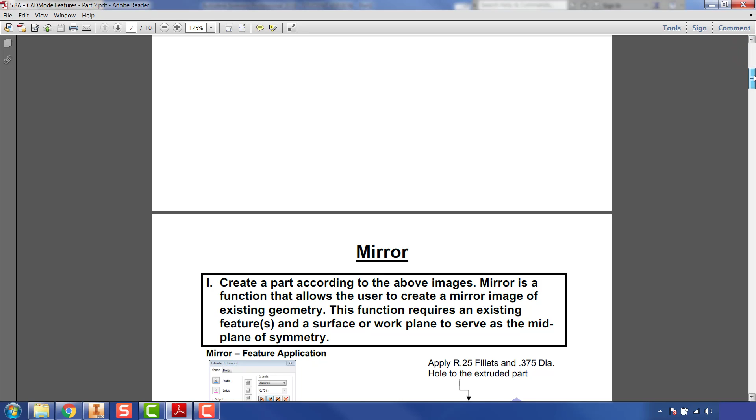For activity 5.8, there are going to be 4 parts you're going to create. The first 2 of those parts are going to primarily use the mirror command. We have this first part, which is our mirror practice, and then the second part, which is the connector piece.

So the first thing I'm going to do is make this practice piece, and we need to make this L-shaped extrusion using these dimensions. We're going to add some fillets and a hole, and then we're going to mirror that across and make our mirrored part.

So I'll go ahead and go over to Inventor and open up a new part. And I'll start a sketch on the XY plane. And I'm going to use the rectangle command to make my outline for that L-shaped bracket.

You could use the line command by selecting line and then just outlining. You can do it however you like. I think rectangle is a little quicker, so that's what I'm going to use.

And if I look at my activity sheet, the left-hand side of this is 0.5 by 0.75, and then the right-hand side is 0.5 by 1 inch tall.

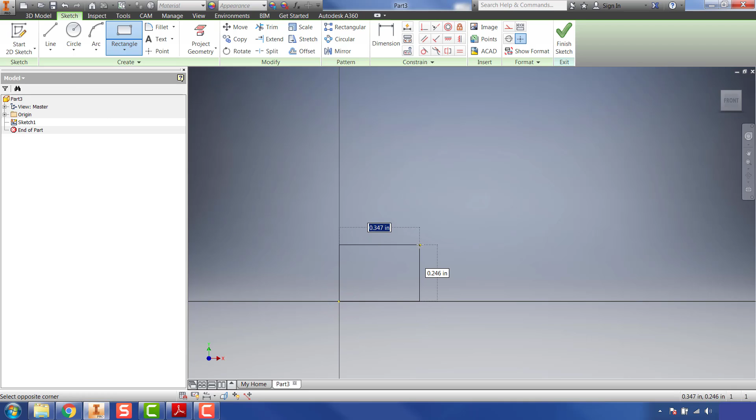So I'll go back to Inventor, snap to the origin, and make it 0.75 wide, and I'll tab to the other dimension, which is 0.5. And then I'll use another rectangle command, snap to the bottom right-hand corner of the one I just made. It's going to be 0.5 wide, tab over, 1 inch tall.

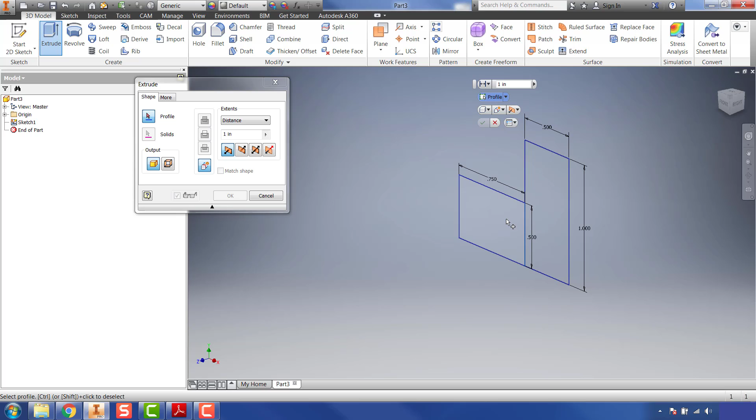I'm going to finish the sketch. Use the extrude command, and if you use the line command, you'd only have one profile to select, or it may automatically select it for you. I need to select both of mine.

And if we look at the activity sheet and zoom in here a little bit, we'll see that that extrusion is 0.75 deep. So go 0.75 and hit enter.

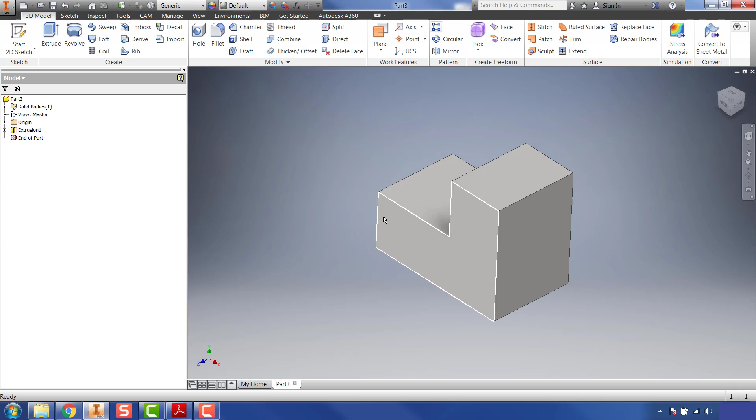Then we need to add our fillets and our hole here in the center. Now these 2 outside edges here have a 0.25 fillet. This inside edge, if you go back to the activity sheet, it's kind of hard to see, but it does have a fillet. It is not 0.25, it's actually 0.125. And then we have a 0.375 inch diameter hole here in the center of that face.

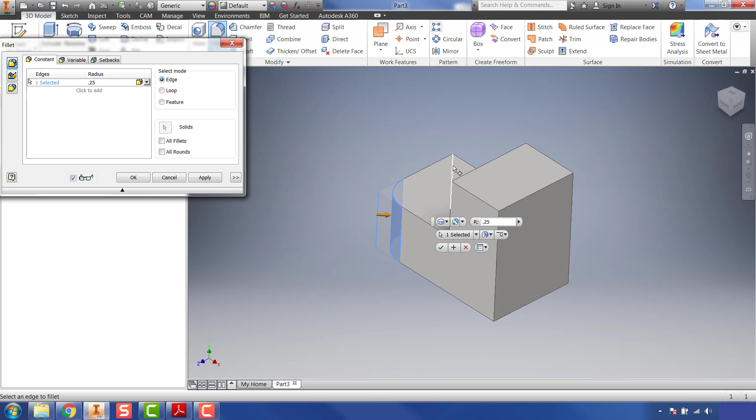So I'll go ahead and grab the 3D fillet and change this to 0.25. And I'm going to select those outside edges. And what you'll notice is I don't have to rotate this around to get that edge - I can actually select it through the part. So I'll go ahead and select that and hit apply.

Then I'm going to change that radius back to 0.125, and I want to select the inside edge of this face and hit apply, and then I can hit close.

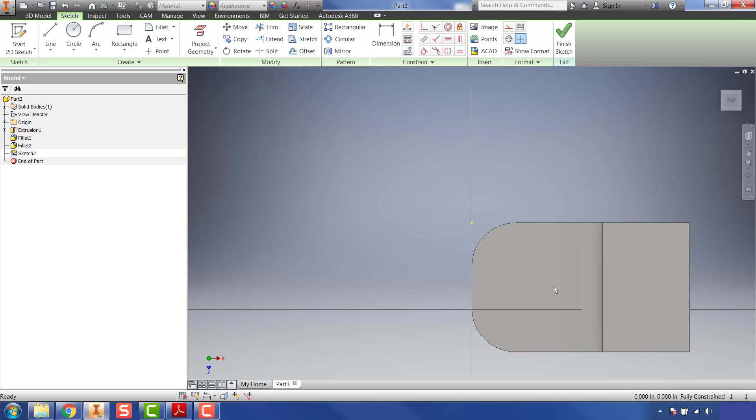Now what I'm going to do is create a new sketch on this face, and I want to put a hole right in the center of that. So it's going to be 0.375 inches.

So I'm going to grab a circle, and I'm just going to place it somewhere in the center here, close to the center, and give it a diameter of 0.375 and hit enter.

Now you could also place a point and then use the hole command. Since this is just a standard through hole with no threads or countersink or anything, I'm just going to use a circle and extrude. I want to grab my dimension command, and I know the depth of this is 0.75, so I want to go from the center point to the back here.

If I can click in the right spot, that might be helpful. Go from the center point - having all sorts of trouble today. Try that one more time. From the center point to this back edge, and I want that to be 0.75 divided by 2, which is 0.375.

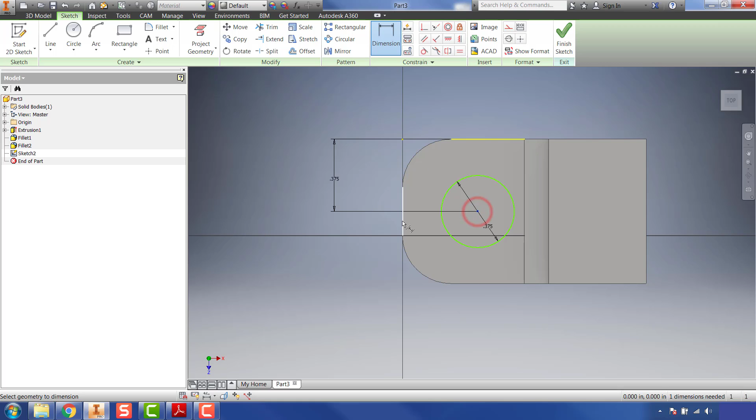And then I want a dimension from the center point to the left-hand side here, which is exactly the same, and I can type 0.375, or I could do the 0.75 divided by 2.

And I'm going to finish that sketch, and then I'm going to use the extrude command, and I want to do a cut. And instead of doing a distance, which will work, I actually want to do To Next. And then what I can do is go to the bottom and select this - actually I'm sorry, I want to do To, and then select this bottom face.

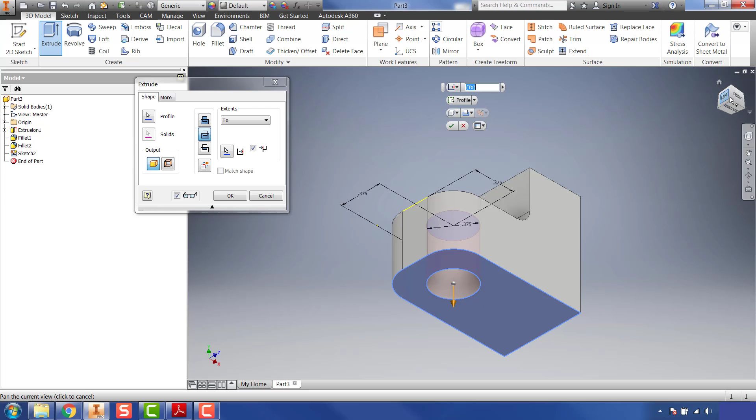That'll extrude or create that extrusion depth to that next face. So now if I go back later and change the dimensions of this, it'll still extrude all the way through, and I won't have to go back and change my extrusion, which is really convenient.

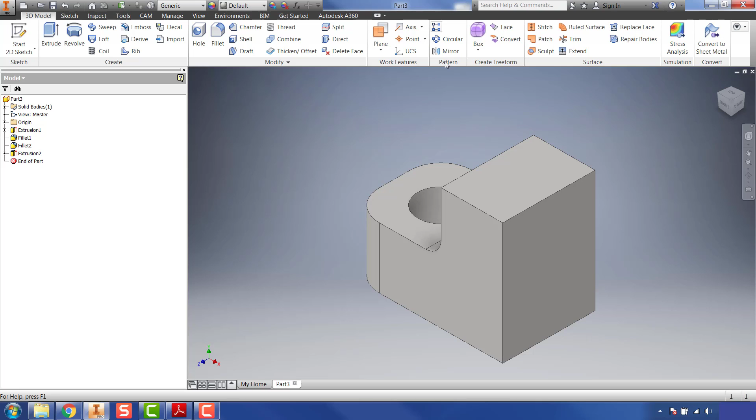Now that I have those features, I'm going to use my 3D mirror command, located under the pattern panel. I'm going to grab mirror, and I want to select all the features. I want to select the original body itself, then I need to actually select all the features I added, which are those 2 fillets, this hole, and also this inside fillet as well.

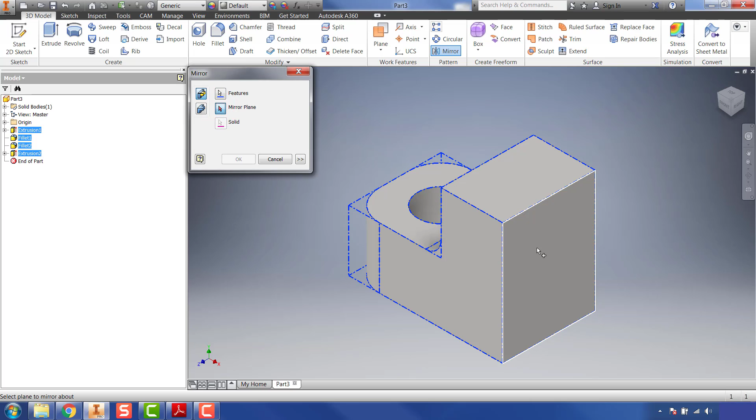Then I'm going to go to mirror plane, and I want to use this inside face. You'll notice a wireframe outline of what's being mirrored over. And then if you hit OK, your part has been mirrored over.

If you'd like, you can go in and change color. For some reason I like this gold color, so I'm going to add that gold color, and make sure I go and save that part. It should be saved, or you should create a 5.8 folder within your IED folder to save all these parts to, and just make sure you go and save this part.

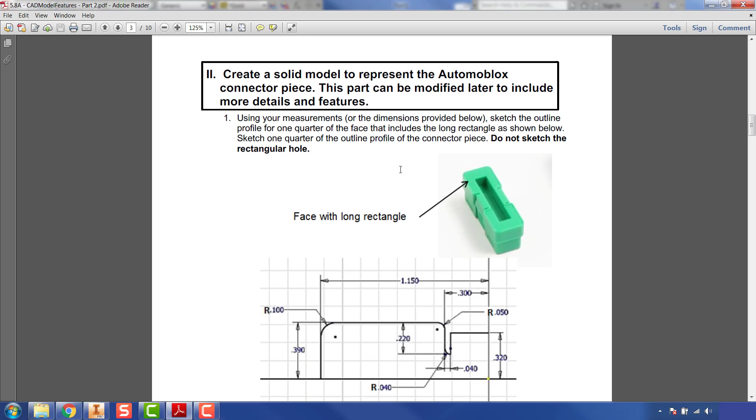Now after that part's done, we need to create the connector piece. So if I go back to my activity sheet, zoom out just a little bit and scroll down, I need to make this connector piece. The sketch that you're actually going to make is this first sketch on the activity sheet.

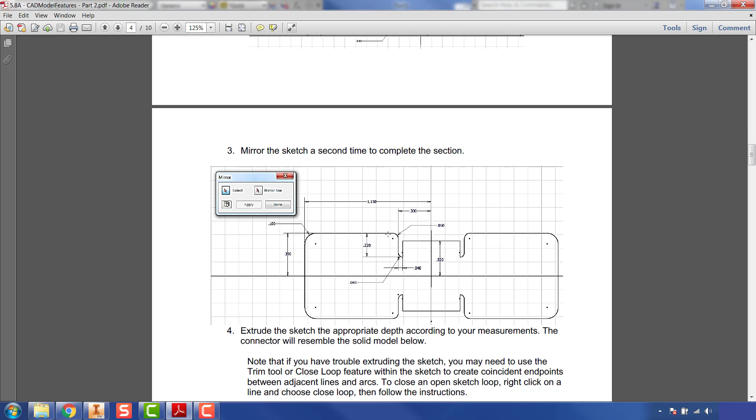Now if you look through the activity, it tells you to create that sketch, and then in your sketch in 2D mode to mirror that over and then mirror it a second time to get that part over, and that's a way of doing it. You could also go through or create this sketch, extrude it, and then do a 3D mirror as well.

So I'm going to go ahead and create this sketch here. If we go into Inventor, I'm going to go to New, Standard IPT file, and then create a 2D sketch on the XY plane. I'm going to take a look at my activity sheet here, and I know the overall width here is 1.15 and the overall height is 0.39, so I'm going to start there.

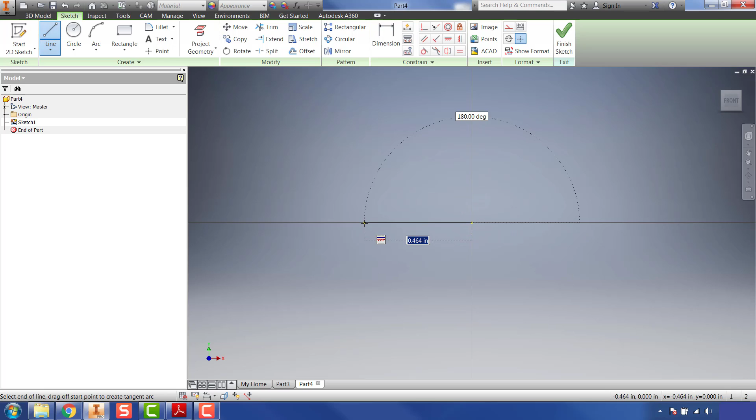I'm going to use my line command from the origin, and I'm going to go to the left this time instead of right like we normally do, and I'm going to make that dimension 1.15, and then my height dimension should be 0.39, or my height line for this section.

Click OK, and I'm going to go back and look at my activity sheet, and I know the distance from this outside edge to here is going to be 1.15 minus 0.3, so I can actually go ahead and type that in. I'm going to use the line command, and I want to make sure that's perfectly at 0 degrees, and it's going to be 1.15 minus 0.3, which is 0.85, and you could have done the math yourself, but might as well let Inventor do it.

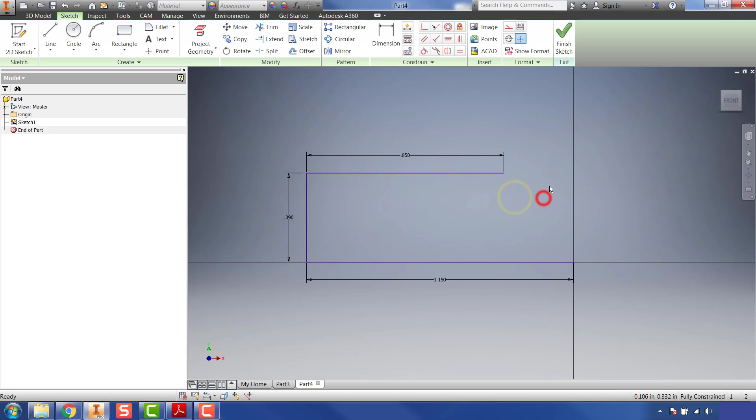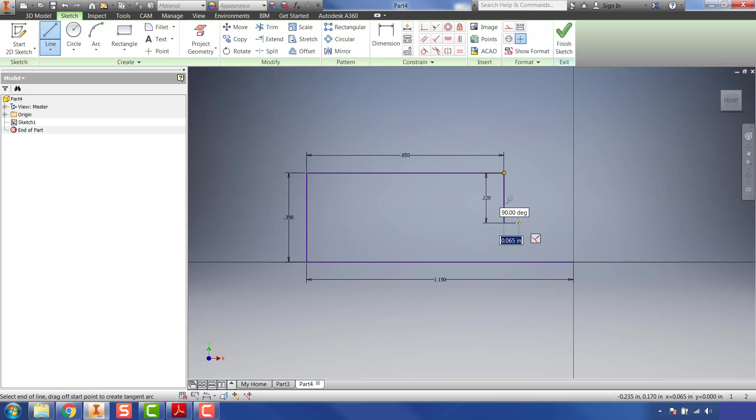We can jump back to the activity sheet. I know this line is going to be 0.22 tall, and then that is going to be 0.04 wide. So grab line command again, 0.22, and then make sure it's parallel or horizontal, and 0.04.

I click OK. I'm going to come back to my activity sheet. I know that this line here, I'm going to go back to my origin here. This one's going to be 0.32. So I'll go ahead and make that line there, 0.32. Right click OK. I'm going to jump back to my activity sheet.

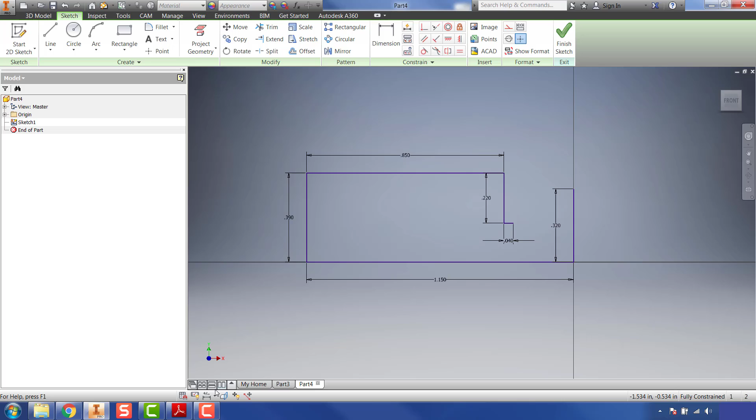And I know that the distance of this line here is going to be 0.3 minus 0.04, or this dimension here. So I'll go back to Inventor, grab my line command. And this line is going to be, make sure it's horizontal, and it's going to be 0.3 minus 0.04.

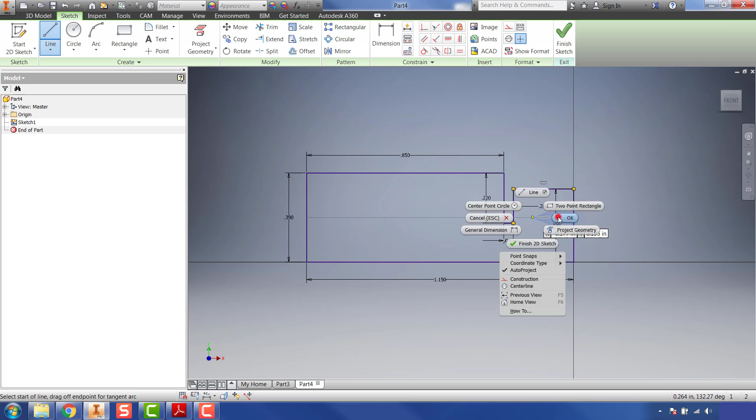And then I can just come down here and finish that connection and hit OK. Now I got the general shape, but if we go back to the activity sheet, I have several fillets I need to add. I have this outside fillet here, which is a radius of 0.1, a fillet here which is a radius of 0.05, and then a radius here which is a fillet of 0.04.

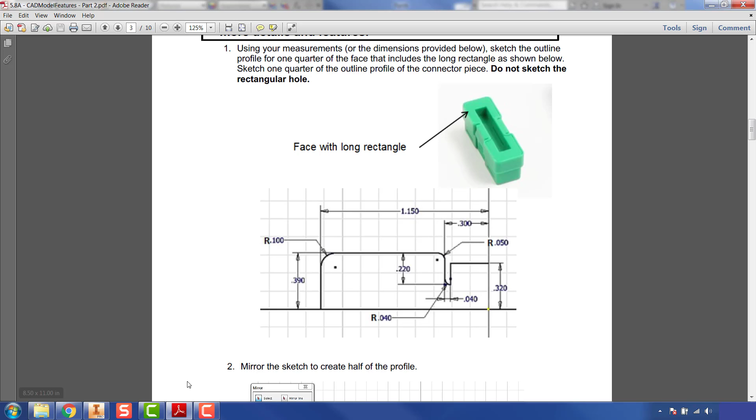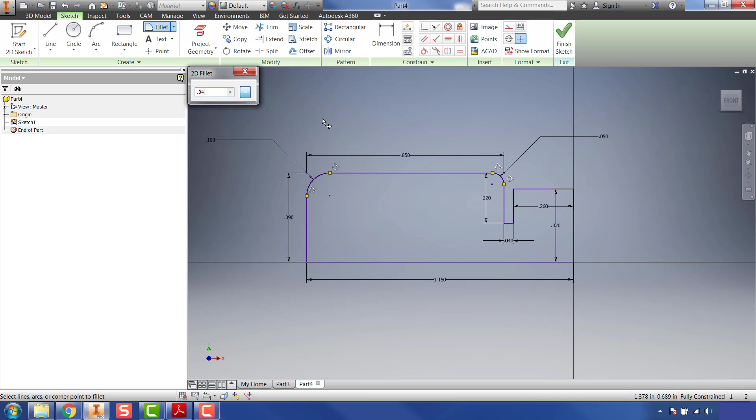So I'll go back to Inventor, grab my 2D fillet command, and I'm going to change that to 0.1, and add the fillet to this corner. Then I'm going to change that to 0.05 and add the fillet to this corner here. And then one last time I'm going to change that to 0.04 and add that fillet to that inside corner there, and hit close.

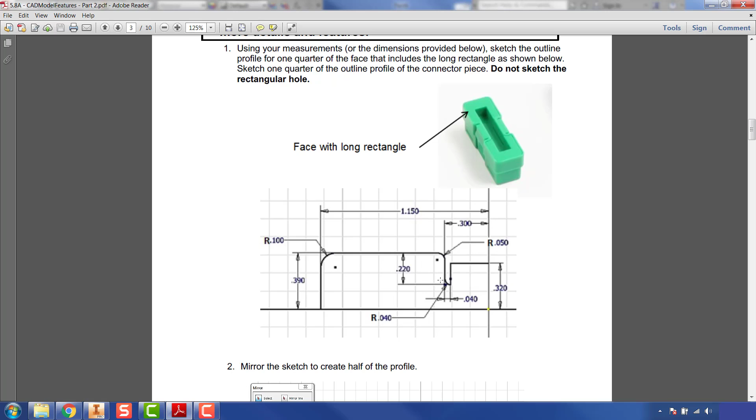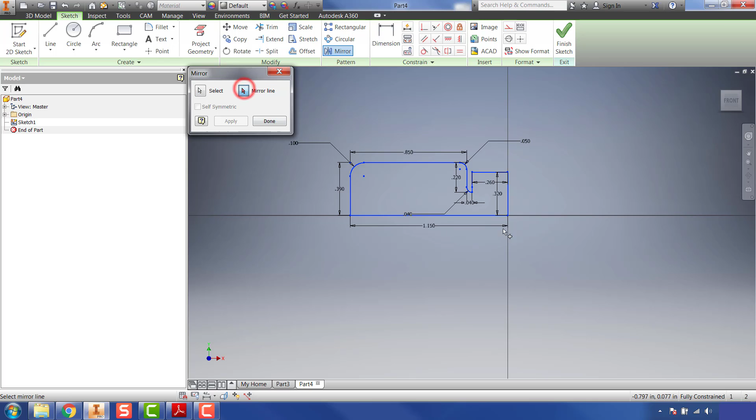Now if I go back to my sketch here, all my fillets are added, so I'm ready to mirror this part. So once again, I could do this as a 2D or 3D, so I'll show you 2D first. If I want to mirror this entire part, I'm just going to grab the mirror command in sketch mode, and it's asking me to select, so I'll click and drag a box around everything I'd like to select, and then select mirror line, using this right hand vertical line, and hit apply, and that's going to mirror that over to that side.

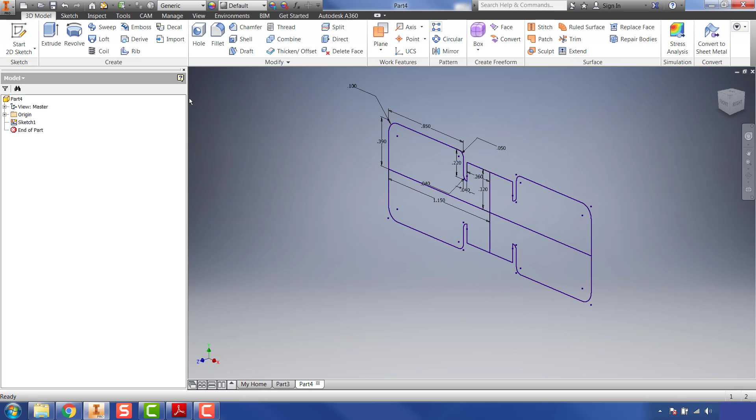Then I'll just grab the mirror command again, select both of those sketches, use the mirror line as this bottom line, and hit apply, and then mirror that over. Then I can take this in, grab the extrude command, select each of the profiles, and what you'll notice is this doesn't allow me to select these parts. And that's most likely because there is a constraint somewhere, or lines aren't connected, or whatever it may be.

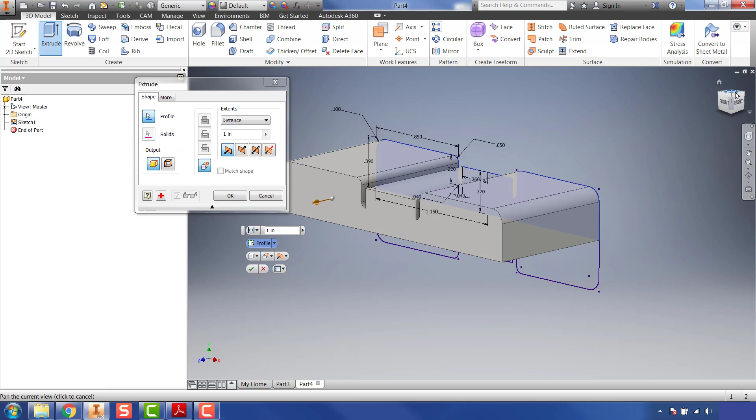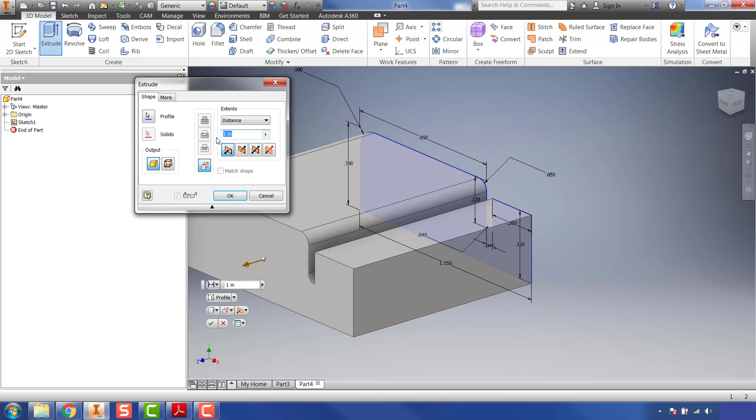And this is the exact reason why I do not like using the 2D mirror. So instead, we undo here. I'm going to go back into the sketch, and I'm going to go back to this original sketch, and finish that. And then I want to use the extrude command, and we're going to extrude this. The dimension's not in your activity sheet, so we're just going to use 0.4 as your extrusion. Hit OK.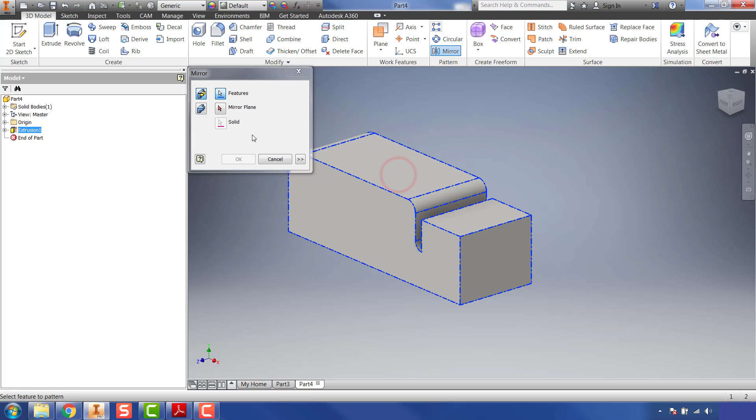Instead of mirroring in 2D, which you can do and works most of the time, but sometimes you can run into problems like we just did, I'm going to use the 3D mirror command. So I'm going to go up to the pattern panel and grab my 3D mirror command. I'm going to select the features I want to mirror, which is this profile that I extruded, and my mirror plane, and select this face, and you'll see the wireframe, so that mirrors over.

We'll do that. And then I'm going to do it one more time. I'm going to select both features that I want to mirror, rotate this around just a little bit, and then select my mirror plane, which is this bottom edge, and then I can mirror that over.

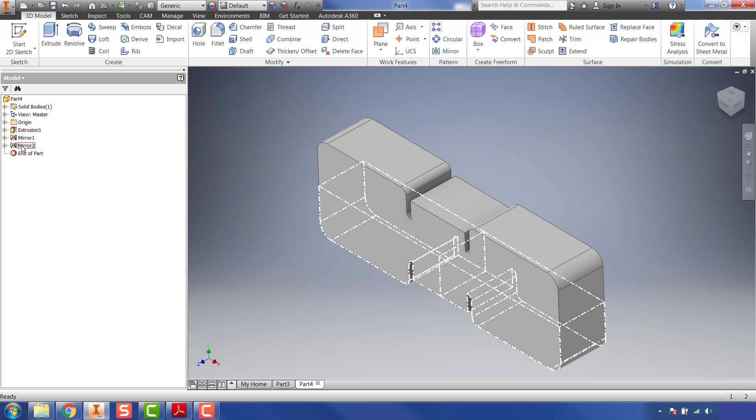Now, the advantage or disadvantage of this is if I do it this way, I have an extrusion and two mirrors over here. But if I need to go back and edit this thing, I can still go into the extrusion and edit the original sketch. So the disadvantage of doing it this way is you have more features in the browser. The advantage is that it's a little more foolproof as far as sketches and mirroring and making sure things line up and allowing you to extrude. So whichever method you want to try is up to you.

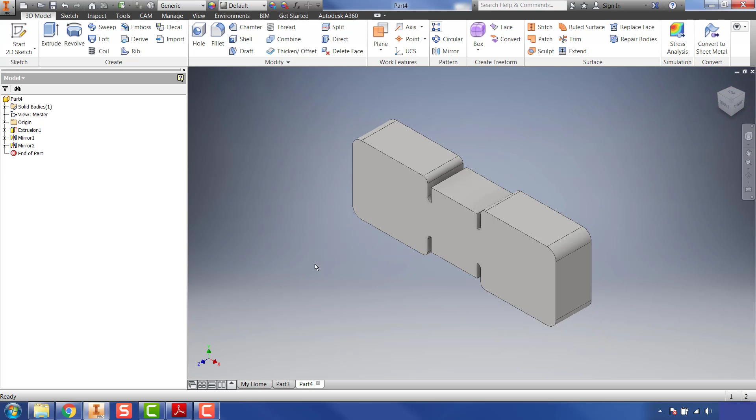Once you have this done, make sure you go to save this file. You can go ahead and add a green color to it if you wish. Let's see, go down to smooth dark forest green. I'm going to add that green there.

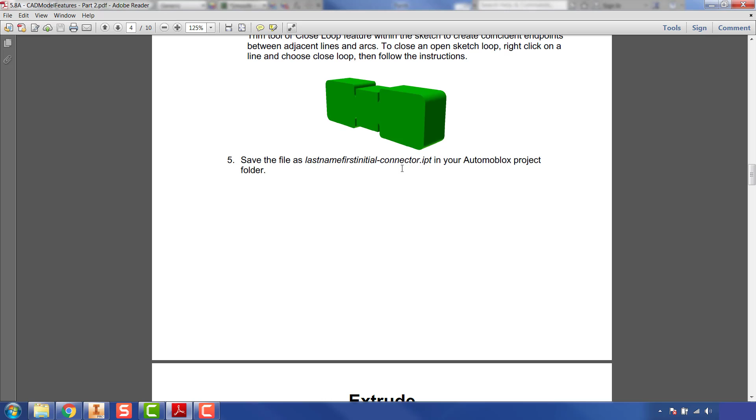Go ahead and save this part using the naming convention given in your activity sheet, which is last name, first initial, and connector. If you want to use the convention we've been using, which is connector underscore first initial last name, that's fine as well. And make sure you save that to your 5.7 folder, and then you are done with this second part.